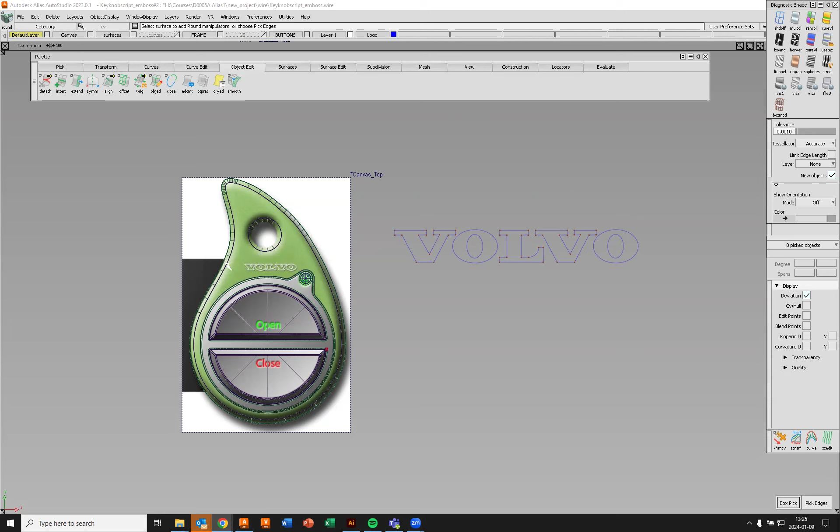Today we are going to emboss the logo onto our keyfob. As you can see here, it looks like a gingerbread frosting thing. I've downloaded a vectorized curve model of the Volvo logotype, and you are allowed to do so too. Just make sure you get curves of good quality, because sometimes the curves are really bad quality and you end up with messy surfaces. These are good, so we're going to work with that.

The first thing I want to do is turn off those edit points, clean it up a bit, and then move and scale this into the correct position.

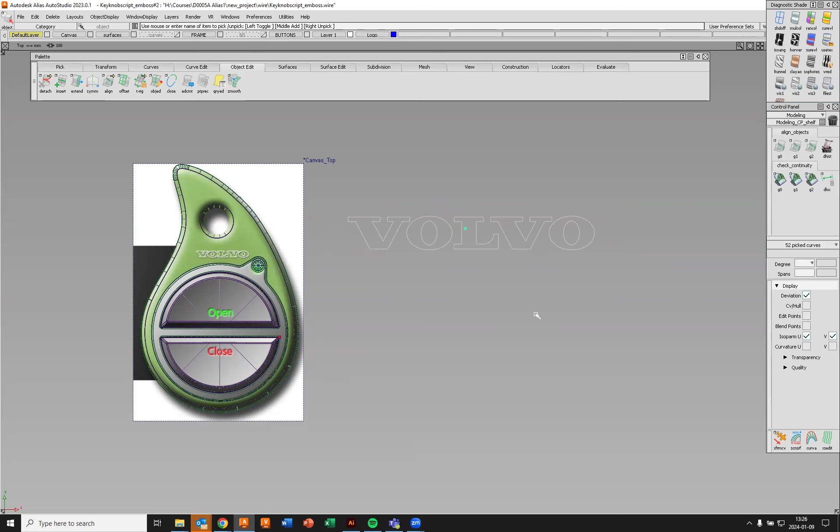We're then going to create some surfaces around it. So I go pick object - I've already grouped all of these curves into one object - then scale it down to roughly the size I want, and use the move command to move it into place. It's slightly too big, so let's zoom in.

I'll try to first place it correctly and then bring down the scale somewhat, to somewhere in that area, I would say. Correct one - oh, something like that, I think.

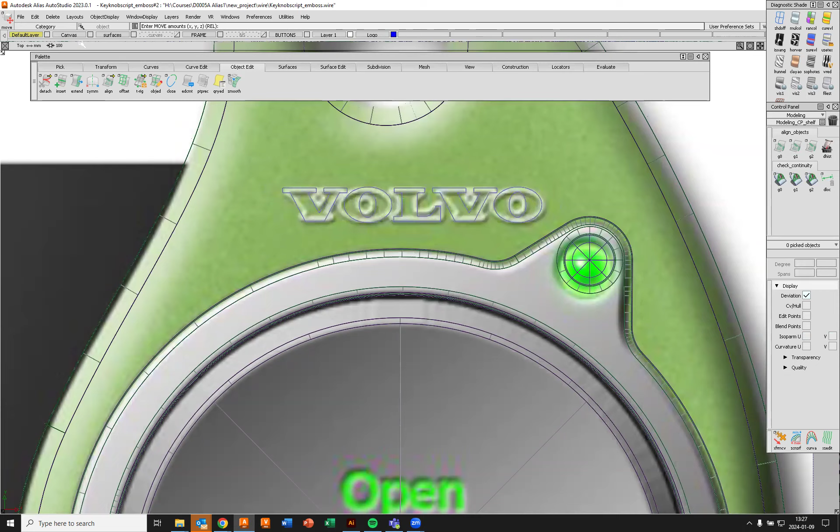So pick nothing would turn off the canvas image so you can see it clear, something like that. This is the text I want to emboss to make it stand out from this surface right here.

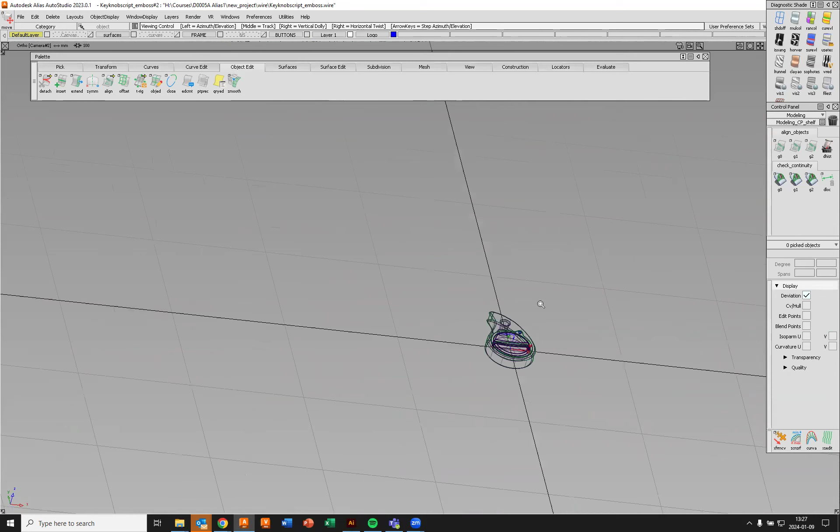In order to do so, we need to move it into the correct height to begin with. I'm then going to extrude these curves into surfaces and let them stick out from that surface. So I want to look at this from the side view, and I'm going to hit F7.

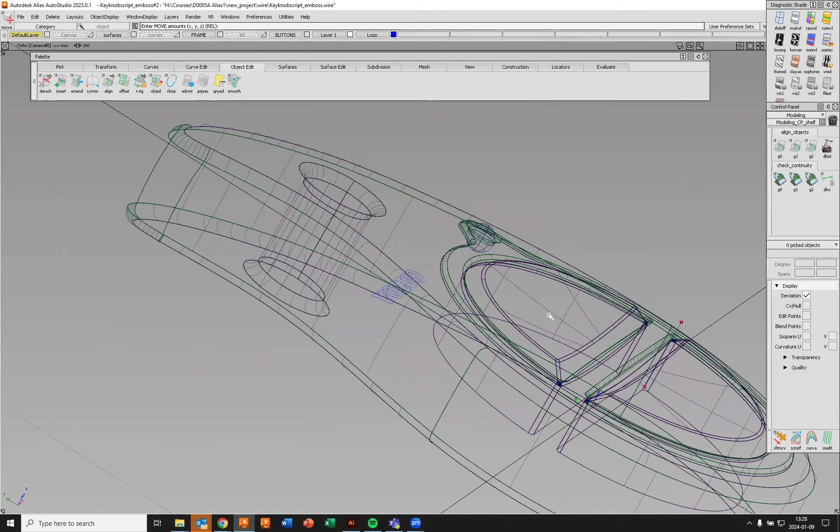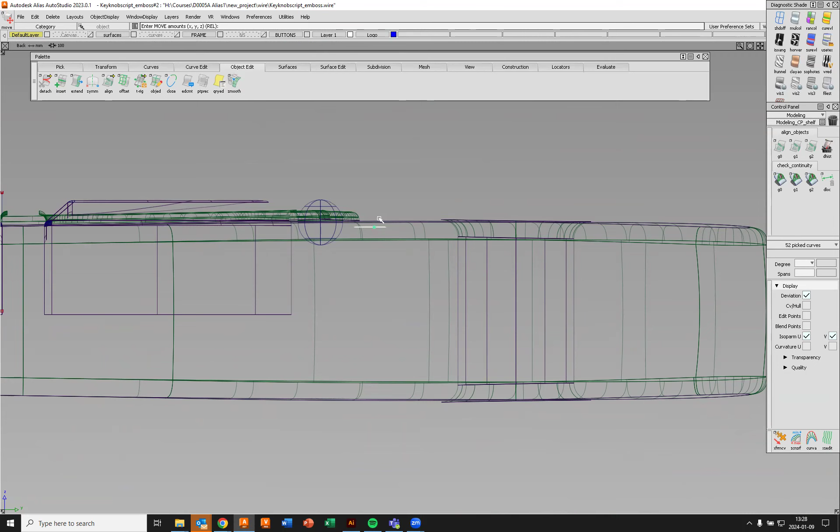to place my logo in the Z direction also. So I pick object, pick all the curves, move, and use my right mouse button to move it upwards just under the surface right here. And go back with F8 to the perspective view.

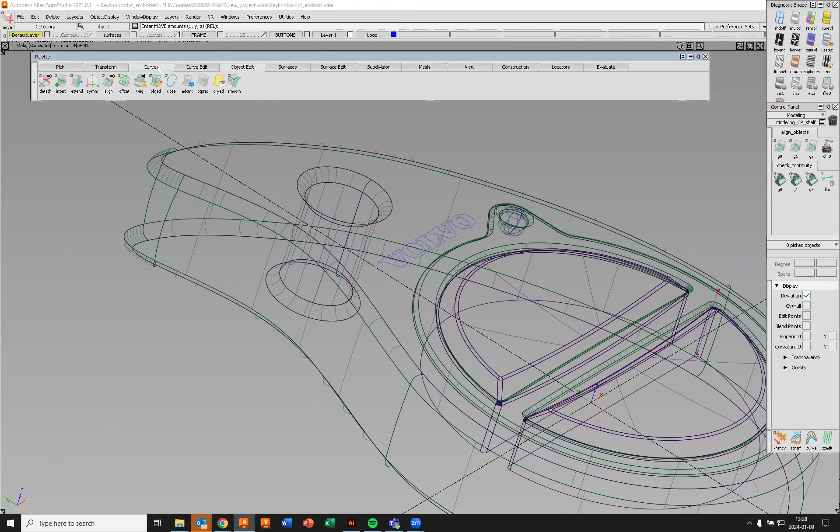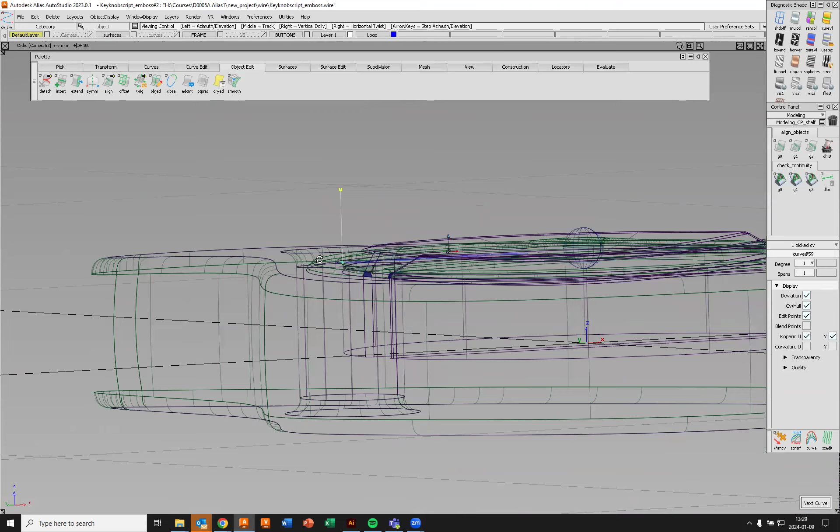Next, I'm going to need a vertical vector to extrude all of these curves along. So I'm going to make a new curve under curves, new curves, new CV curve, snap it onto one of the letters here, and make a second CV point straight up in the Z direction. I do that by clicking my right mouse button, and I get a straight line parallel to the Z axis.

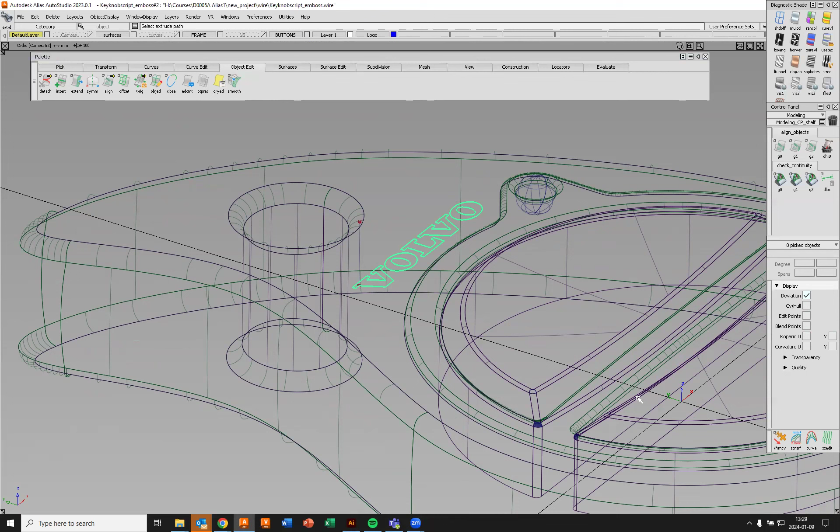I can now go pick nothing, pick object again to select all of these curves, then hit surface, swept surfaces, extrude. I've already selected my curves, so I go and click on the vector. That gives me surfaces that stand out.

Now this is a bit too far, you probably realize that too. This is one of the beauties of having construction history on some of the commands in Alias. You can always go back and change the curves that were used to create the actual function here, and in this case I used my vertical vector with two CV points.

So if I pick one of the CV points and move it in the Z direction, like so, the surfaces will update. If I go back to the side view with F7 and bring that line down so it barely goes above the surface here, something like that - I'm guessing now, I could always update that later - go back to perspective with F8 and have a look at what we see here. I'm going to shade the entire model and see.

And that looks pretty good, doesn't it? If I want to change this now, I can always grab this CV point right here and move it up or down to make it stand out more or less. But I think maybe something like that.